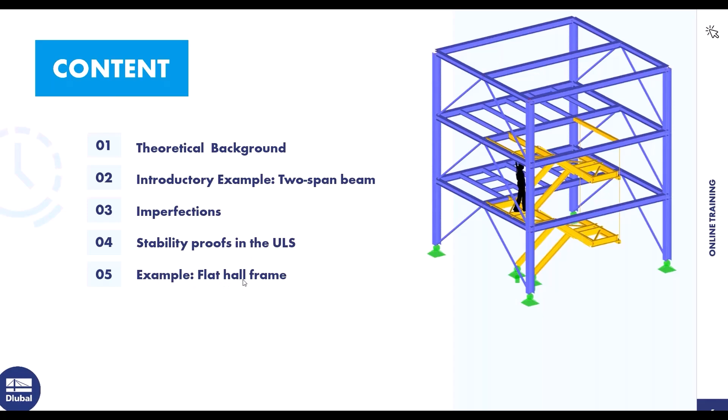Okay. First, I'll say something about the products for design according to EC3. The most important add-on is the steel design add-on. With that add-on you can design steel members according to international standards like Eurocode, AISC, and so on. We calculate or design according to Eurocode today.

Then there's the add-on torsional warping. With that add-on you can consider the 7th degree of freedom and the torsional warping. Then steel joints - with that add-on you can analyze steel joints based on the finite element method. Then there's the cross-section program, RSECTION.

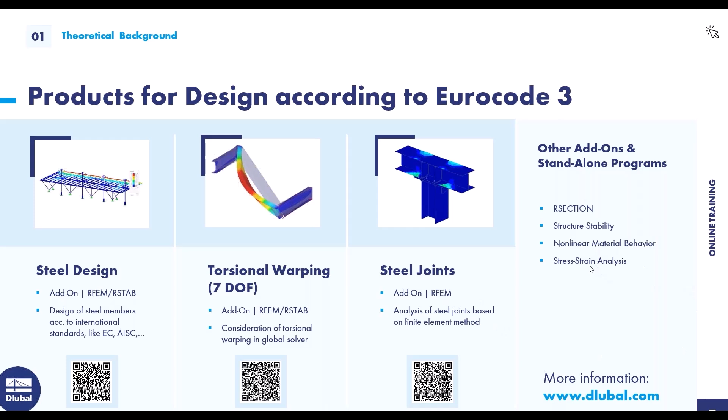Then the add-on structure stability - we use that add-on in the second example. Then there's the add-on nonlinear material behavior. You can, for example, consider a plastic design of steel plates or so on. And then there's the add-on stress strain analysis.

Okay, then a little insight into the whole safety concept in steel construction. The actions should always be smaller than the resistance. Those are the actions, this is the resistance. In addition, we have certain coefficients that we have to take into account depending on what type of proof is used. You can see the different coefficients here.

And those are the coefficients for the German national annex. You can see there is for the stability analysis another safety coefficient. But if you select the German national annex, for example, or another national annex, this coefficient is considered automatically by the program.

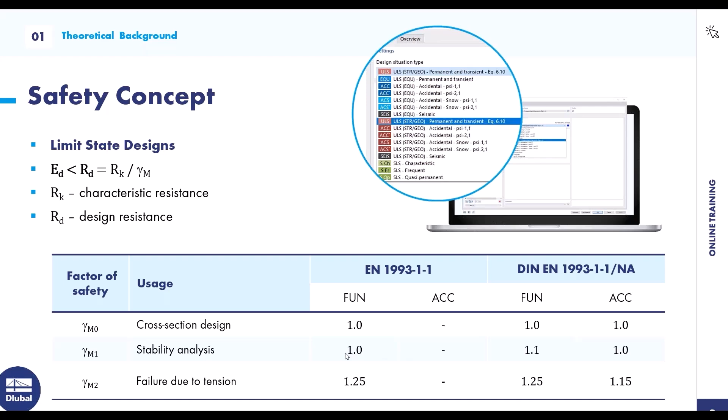So, okay, then the next slide - elastic or plastic global analysis. Whether an elastic or plastic calculation is possible always depends on the cross-section classes. There are 4 cross-section classes. In the first cross-section class there's a high rotational capacity, and this allows a plastic structure calculation.

For example, you can consider plastic hinges, but it's not so often used in practice. And the cross-section resistance can be applied plastically. Cross-section class 2, where there is a low rotation capacity, allows an elastic structure calculation. And as with cross-section class 1, the cross-sectional resistance can also be applied plastically.

The first and second cross-section classes are where you can consider a plastic cross-section resistance. Then cross-section class 3 and 4 allow an elastic structure analysis, and the cross-sectional resistance can only be applied elastically. For cross-section class 4, only a reduced cross-section resistance, the effective cross-section.

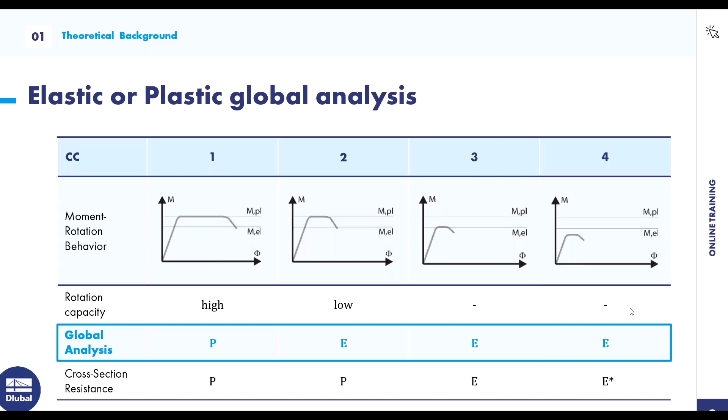That's the first example, the two-span beam, with a field length of 12 meters left and 12 meters right. A beam IPE 550, steel S235, a self-weight load case, and a load case with an imposed load.

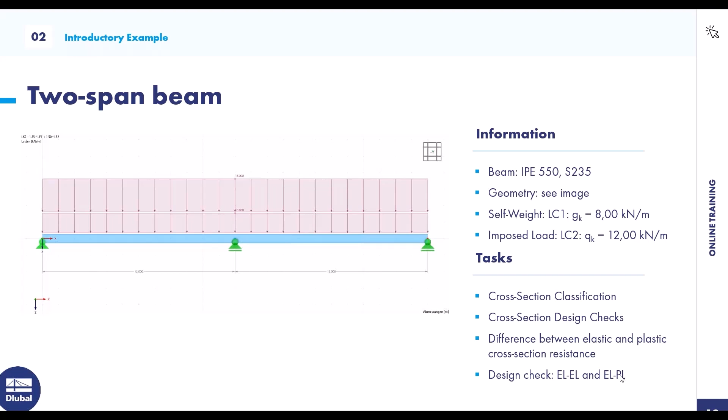And we will calculate or do a cross-section classification, cross-section design checks, the difference between elastic and plastic cross-section resistance. We take a look at the design checks, elastic and elastic-plastic. Okay, I turn to RFEM.

That's the second example, it's already prepared. But for the first example, I'll model the complete structure. File, new.

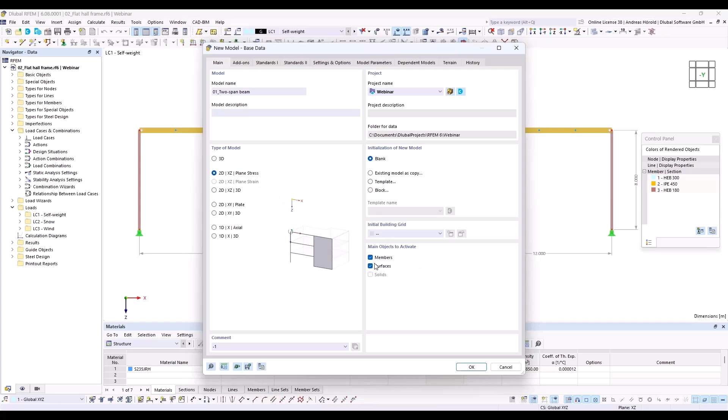So I enter 01_Two-span beam. Then type of model 2D is sufficient. We consider only members, but you can also select surfaces, that doesn't matter. And we select the steel design add-on.

Then we need to select the standards. You can see there are, for the load cases classification and the steel design, different international standards. We select the Eurocode, and for today we are in Germany here, we select the German National Annex.

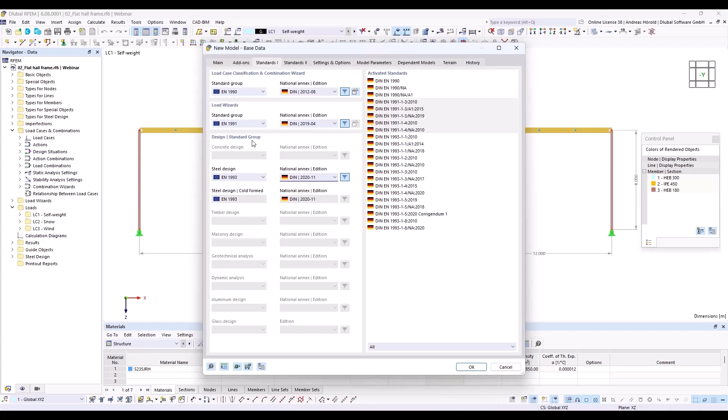We don't use the load wizards, but we use the load case classification and the steel design. We leave the dialog with OK.

So I turn to the view -y, move it a little bit. So the grid is 1 meter. I leave that. If you want to change that, you can click on this here at the bottom, display grid, right click and then edit. And you can change the space for the grid points.

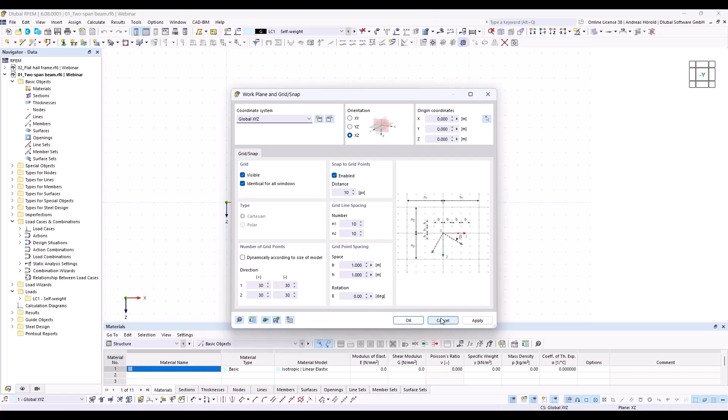So I start with the beam, here left above, new single member. I need to define a section, create new section. I turn to the library, left above, an I-beam.

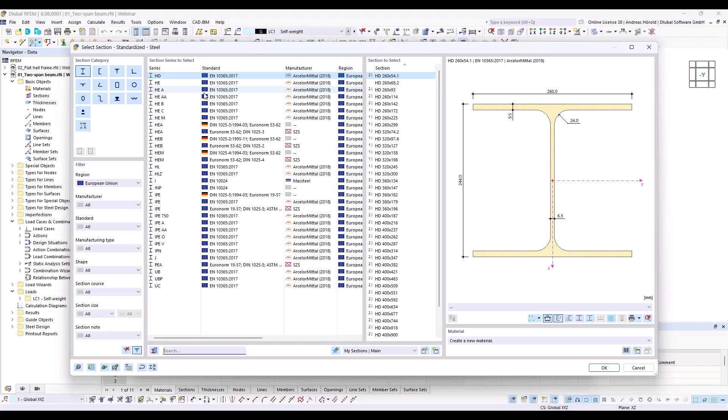That's sufficient. Okay, I select IPE 550, and right at the bottom I open the material library.

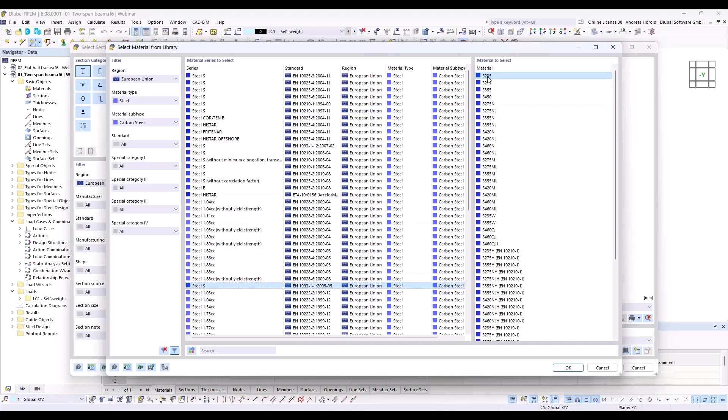And I select European Union, steel, carbon steel. There are a lot of steel materials. I use the steel material S235. Okay, you can see now the color is blue. That's okay.

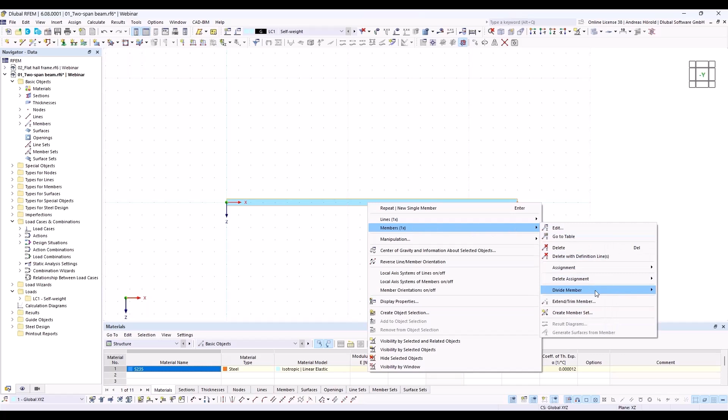So I create a member with a length of 24 meters and I divide the member in the middle with right click, members, and divide member and intermediate nodes. One intermediate node, and I create a node without dividing the member. I select this option here, create on member nodes without dividing member. Okay, there's the node.

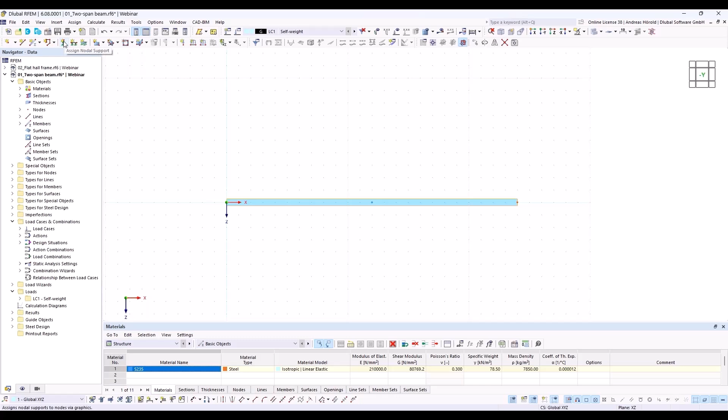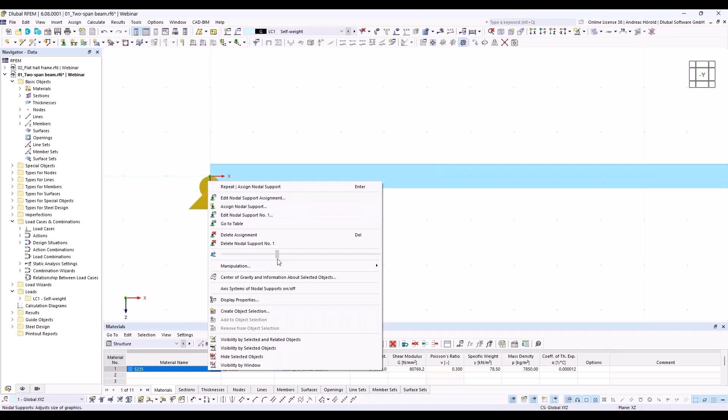So then I create the supports. Here left above, assign nodal support. So I press the edit button to take a look if all is okay. Yes, we support in X direction and in Z direction. Okay, and this node is quite a little bit small. With a right click, I can increase the size of the support. Okay, that's enough.

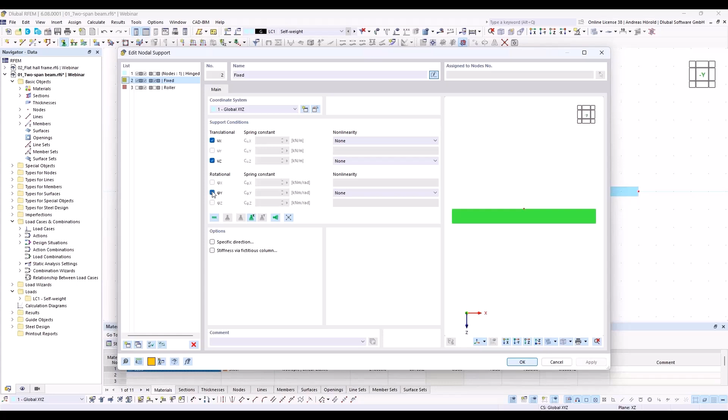So next support, I select the second support and press the edit button. Yeah, we don't want to fix the rotation for the support, and we deselect the fixing in X direction. We only want to support the member in Z direction.

So that's all for the model. I create the loads. There's a self-weight load case. I select the edit active load case. The self-weight load case is automatically created for every model. You can see also the self-weight of the structure is activated. Yeah, that's correct in our case.

So, above this button, new member load. And our load should be a force, uniform. You can see there are different options. And the load direction should be in Z direction, in this direction. So the load magnitude should be 8 kilonewton per meter.

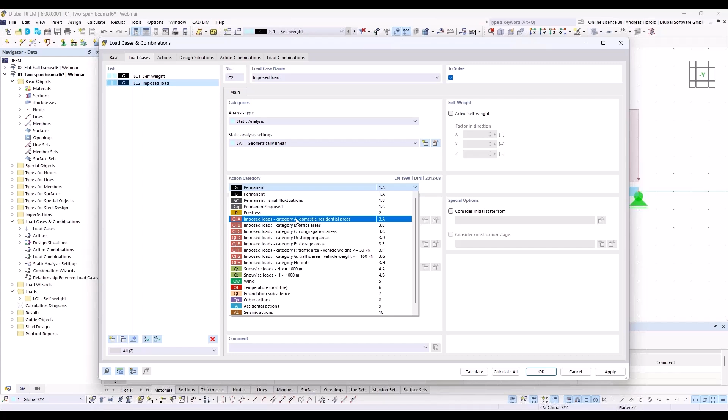Okay, so then I create a new load case with that button. I call it imposed load. And I select the action category, not permanent, but imposed loads.

Okay, then I have to create the load for this load case, new member load, and this time 12 kilonewton per meter. Okay, that's all for the model and for the loads.

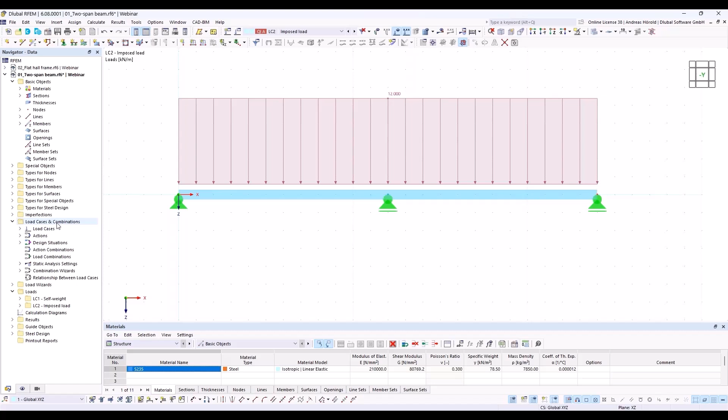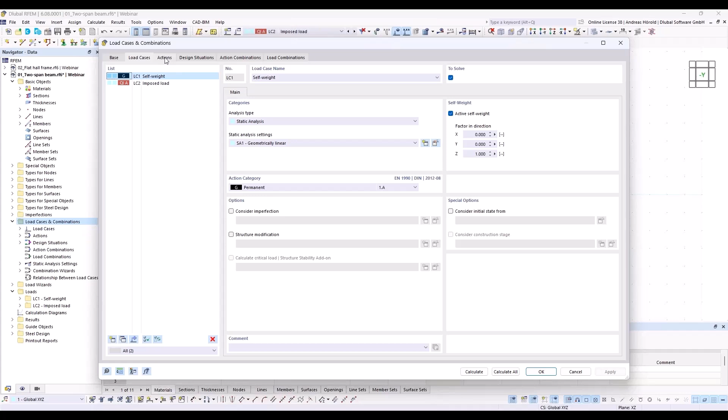I open the load cases and combinations dialog again, this time over the navigator data with a right click. Load cases and combinations, where are the base data? At the beginning, we selected the standard group Eurocode and the German national annex, and we activated the combination wizard. Those are my two load cases. We've got only two actions.

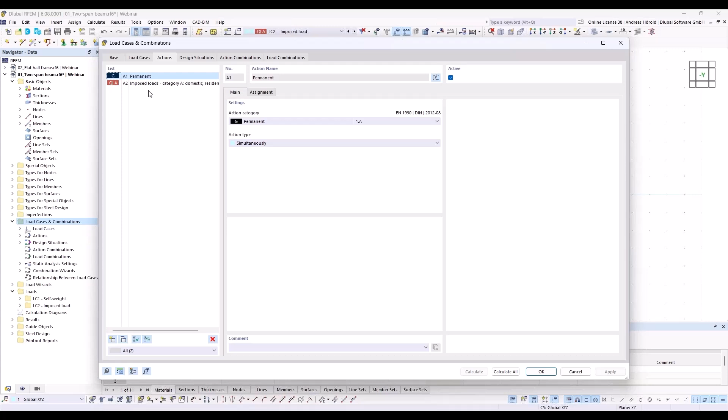Yeah, that's quite important when you have, for example, 4 wind load cases. Then there's only one action for the wind load cases. And you can combine in the load combinations either wind in -x or wind in +x and so on.

So then there are the design situations. We would like to design only according to ultimate limit state. That's why I delete the design situations for the serviceability limit state. And what's important, we need to activate the steel design.

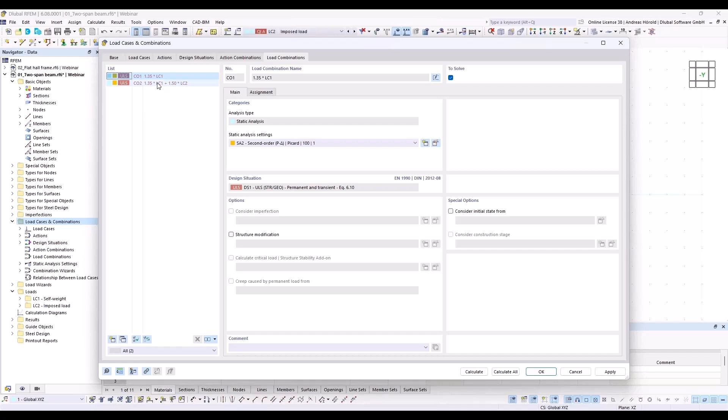So, there are only 2 load combinations. And if I turn back to the design situations and to the overview, these 2 load combinations are assigned for the design situation, ultimate limit state design. So then we can calculate also the steel design.

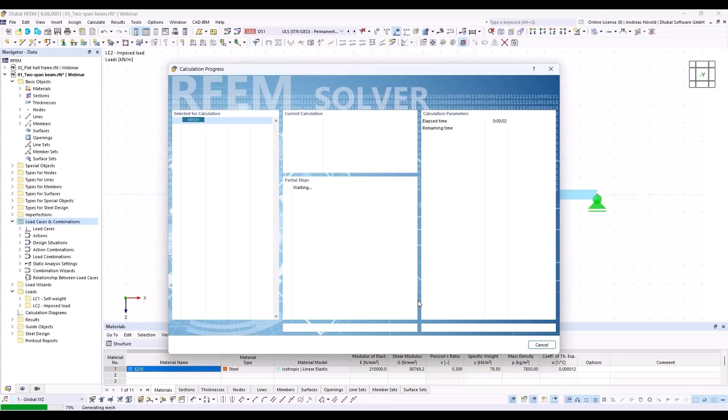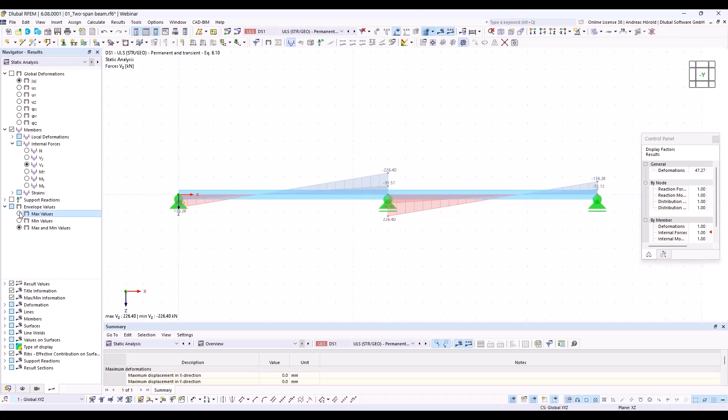At first, we take a look at the internal forces and the navigator results on the left side. The VZ, for example, I can also select only the maximum values, not minimum and maximum. So, VZ and MY.

So, and then we can go to the table at the bottom and to the steel design. An error is displayed after the calculation. This is because we haven't made any steel design settings yet. We are only interested in the cross-section verification here. Therefore,

we change to the table design ratios and members. So there's the section proof for shear and for bending. And you can see a plastic design was done by the program. So if I select the line and press this button, design check details, this dialog is opened.

A detailed presentation of the proofs, as students often request, is now possible. You can see the equations and where you can find them in the standard.

Okay, then cross-section classification. You can see where the cross-section is classified as class 1. That's why a plastic design is possible.

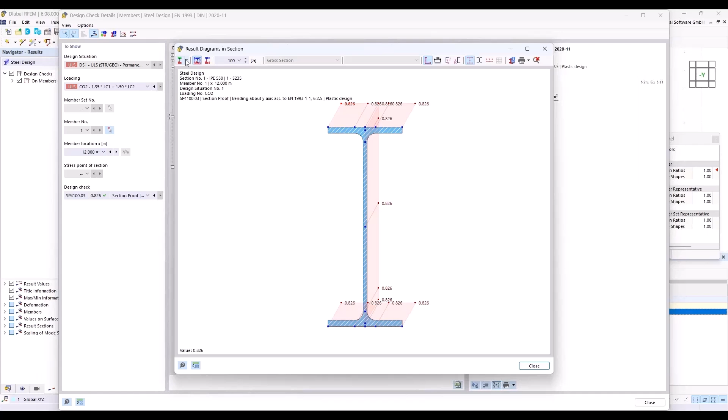So we can also take a look at the result diagram, the design ratio, the stresses. That's the stress in the middle, or over the middle support, and there's tension at the top and compression at the bottom of the cross section.

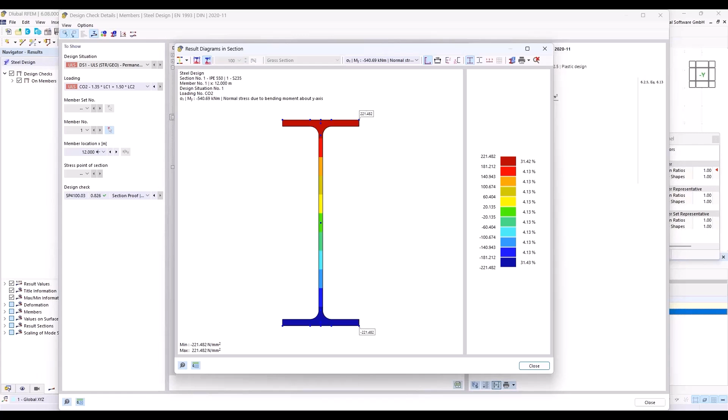So yeah, okay, that's all. Can I show also maybe the cross section information, the stress points, the different sub panels for the cross section classification, the C to T parts.

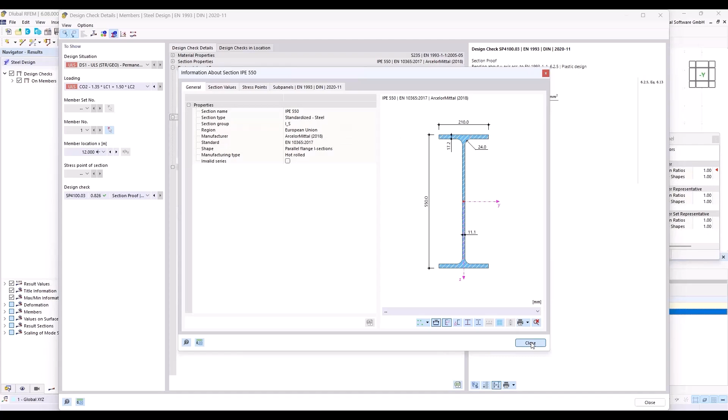Okay, that's all. Yeah, and the same - if you want to check the proof for shear, you can either press that button or double click on the line, and you can see the equations from the standard.

Okay, now we don't want to do a plastic, but an elastic design. How to do that? I turn left at the bottom to the navigator data.

Then I open the steel design folder and the ultimate configurations, and double click on it. Then I can, for example, uncheck the stability design. Then this error message won't appear, but that doesn't matter.

I select that button here: elastic design also for class 1 and class 2 sections. It's allowed to do a plastic design for class 1 and 2, but in this case we would like to do an elastic design also for the cross-section class 1. In our case, the cross-section is cross-section class 1.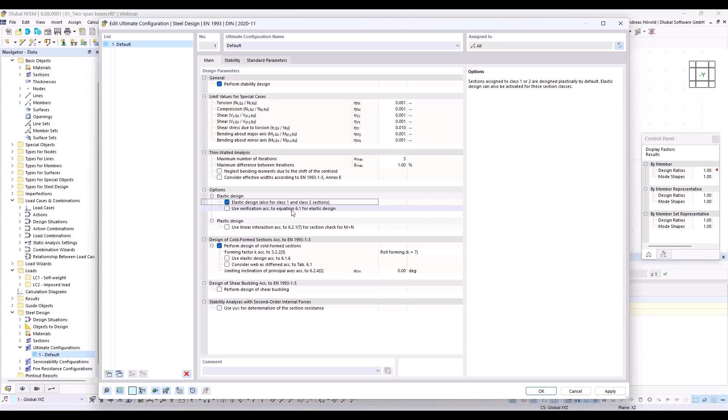Okay, we calculate or rerun the steel design again. And I select design ratios on members. I remember we had a design ratio for the plastic design of 84%, and now we've got 94%, because we do an elastic design. And if I double click on it, I can see the equation.

Okay, what you can hold in your mind is that we can do every time an elastic design. We can consider the elastic cross-section resistance. That's what we did in the second step, in that step here.

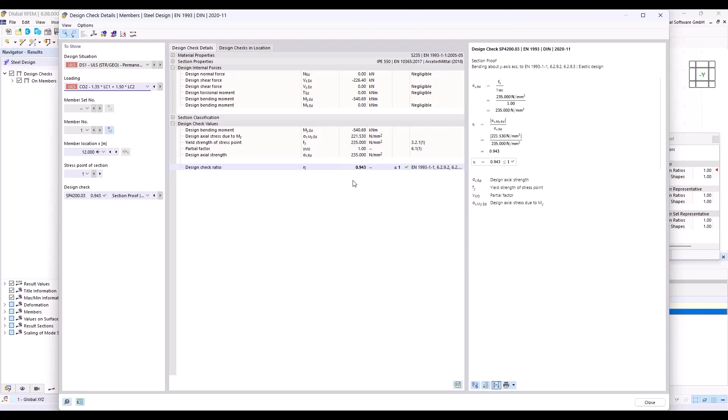So we have now learned how to carry out a cross-section check and how to take the elastic and plastic design into account. At first the plastic design, in the second step the elastic design, because elastic design is allowed for all cross sections. And in addition, we now know how to display the design formulas and compare them with our own manual calculation.

Then we turn to the next topic for today: effects of deformed geometry of the structure.

In the first training course, Introduction to Member Design, it was learned how the results can differ between the calculation according to the first order theory and the geometrical linear analysis, and the second order theory. The geometrical linear analysis is an equilibrium formation on the undeformed system, and the second order analysis is an equilibrium formation on the deformed system.

In this example of the cantilever column, this effect can be seen very well on the basis of a slender and a compact cross-section. In the case of the slender column, the increase in the bending moment at the foot point is much larger than in the case of the compact column, if one calculates according to the second order theory. And there's no difference when you apply the geometrical linear analysis.

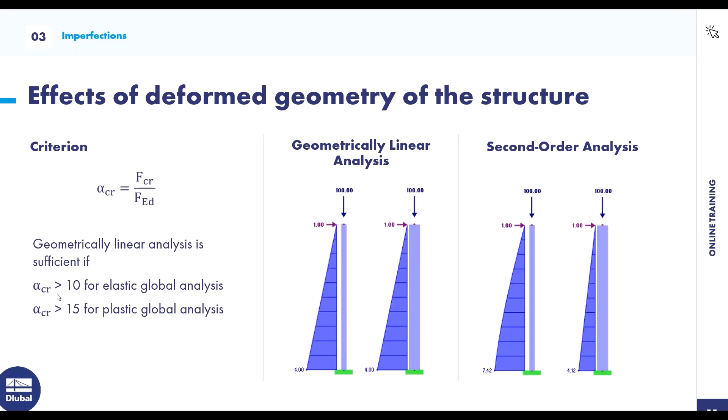And in this case, if alpha crit is larger than 10, then it's sufficient to apply the geometrical linear analysis for an elastic design. And if you want to do a plastic design, the alpha crit must be larger than 15, then you can also design according to the geometrical linear analysis.

So the next point is the equivalent geometric imperfections. Imperfections are also closely related to this topic. These are generally grouped together in Eurocode 3 as equivalent geometric imperfections. What are imperfections anyway? They are production-related deviations in the model geometry and/or in the material properties. There can be real misalignments in classic hall constructions or tolerances in production, especially when rolled sections are used, and these imperfections can be summarized as equivalent geometric imperfections.

On the left side of the graphic, you can see the initial sway, the global imperfection that can be applied to the structure. And if individual components are to be examined more closely, there is the local equivalent imperfection, for example, an initial bow imperfection. This depends on the selected profile, the yield point, the buckling curves, and the proof method. These are the two variants of the equivalent geometric imperfections.

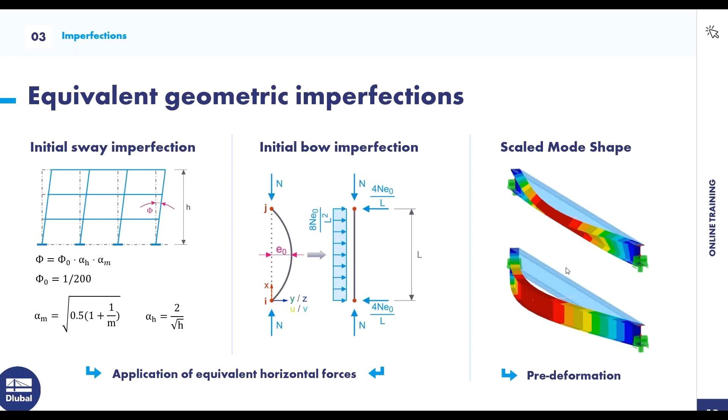Another alternative is pre-deformation, which can be calculated with the help of stability analysis. The respective governing eigenmode is scaled and applied as an imperfection. That's not so often used, but it's possible. What you often use is the initial sway imperfection or the initial bow imperfection, or both. You can see that in a later slide.

When designing steel in RFEM, 3 different stability analyses are carried out. On the left side, there's the classic flexural buckling as a lateral deflection. Then in the middle, you can see the torsional buckling in pure torsion. And on the right side, the lateral torsional buckling as a combination of the two previous proofs.

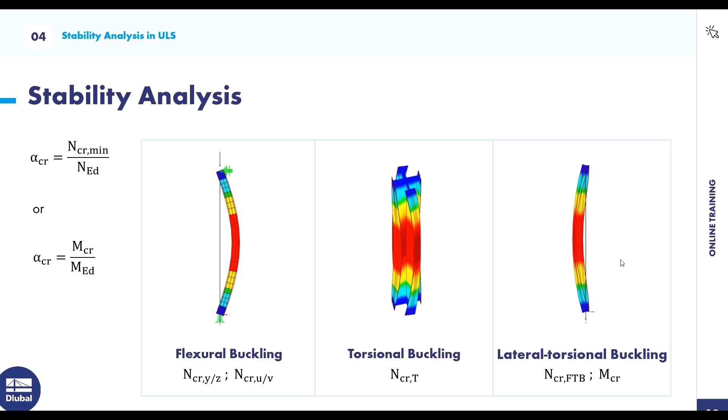Methods for stability analysis. There are 3 methods. Method A: you have to apply a global and local imperfection, and the structure analysis should be done with the second order analysis. Then you can do the cross-section design checks with the internal forces. Method B: global imperfection means only this initial sway imperfection.

So, then the structure analysis according to second order analysis. And what's quite important, you have to consider the buckling length by the member length, not with a factor. SK is equal to length.

Then method C: structure analysis according to geometrical linear analysis on the ideal structure, but in that case with the real buckling length.

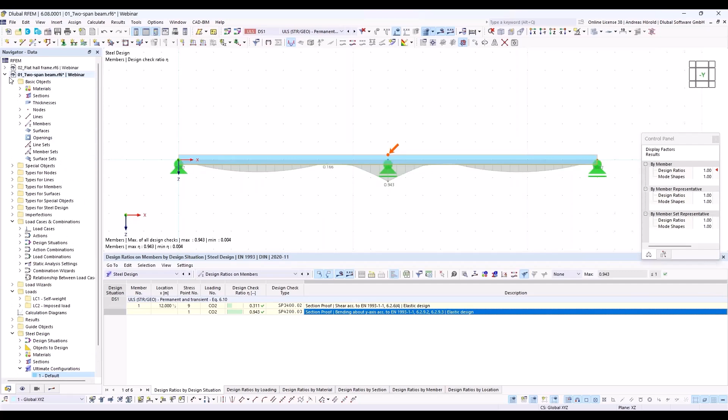Okay, so then I turn to the program, to the predefined example.

So that's the construction self-weight load case, then a snow load case with loads, for example, from purlins, and a wind load case, wind in X direction with wind pressure and wind suction.

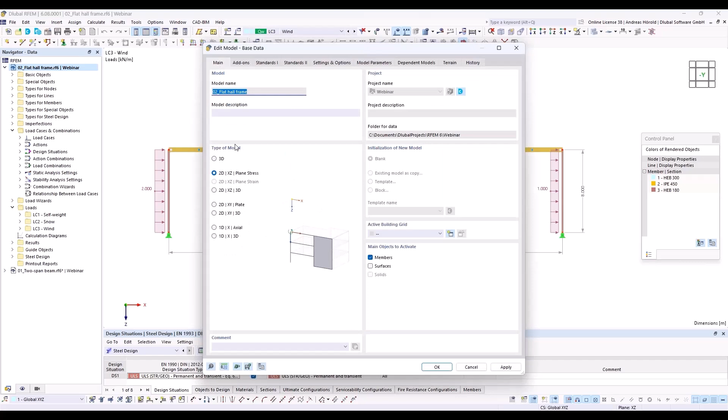Left above, I go to return to the base data, a 2D model, and we use the add-ons structure stability and the steel design add-on. And we select the standards, Eurocode, and the German National Annex.

Okay, so yeah, and we use the add-on structure stability to check whether we are allowed to determine the internal forces according to the geometrical linear or second order analysis.

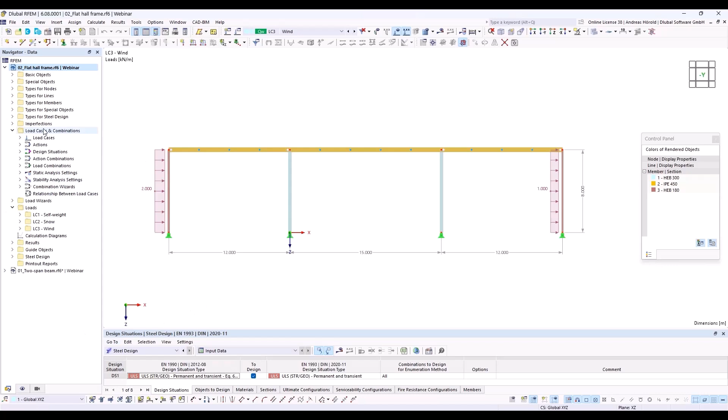That's why we turn to the load cases and combinations, and I go directly to the design situations. I select the geometrical linear analysis, and I edit that, and I activate the stability analysis. Okay, and I run the calculation.

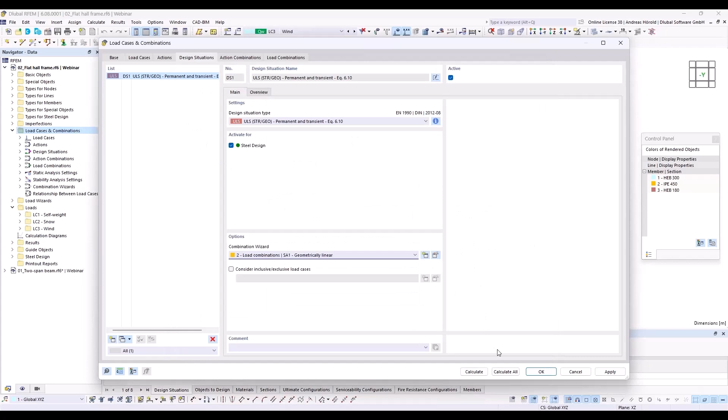So, after the calculation, we see the minimum critical load factor, 6.05 for the design situation, and 6 is smaller than 10. Yeah, we need to do a stability design by using the second order analysis.

Yeah, but what I already mentioned, for the stability design using the classic equivalent bar method, means method C, the internal forces can be calculated according to geometrical linear analysis, and yeah, buckling lengths must be assigned to the columns.

Yeah, but for the design of the lateral torsional buckling, the application of the second order analysis is also required with this method. That's why I switched to the second order analysis. For the columns, we consider the effect twice, one time with the second order analysis and with the real buckling length. But we need to apply the second order analysis because of the horizontal beam and the lateral torsional buckling.

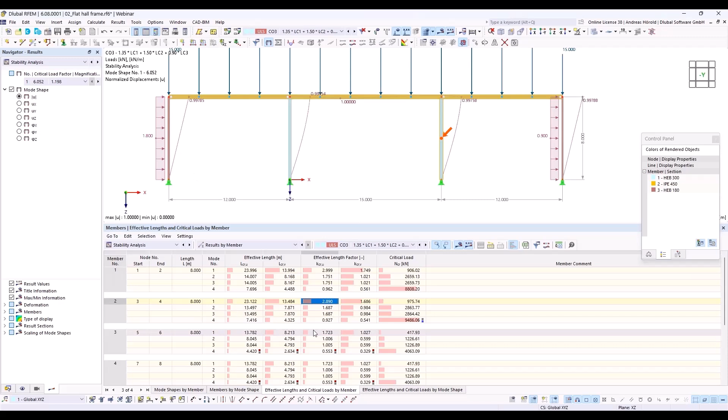So this column has an effective length factor of 3. This column, we apply also 3 for this column. And for the left and the right column, 1.72.

So I turn back to the design situation and we run, or we use the second order analysis. Okay, that's okay.

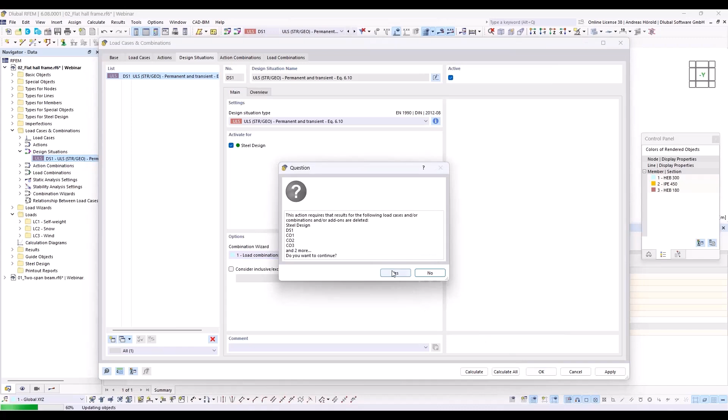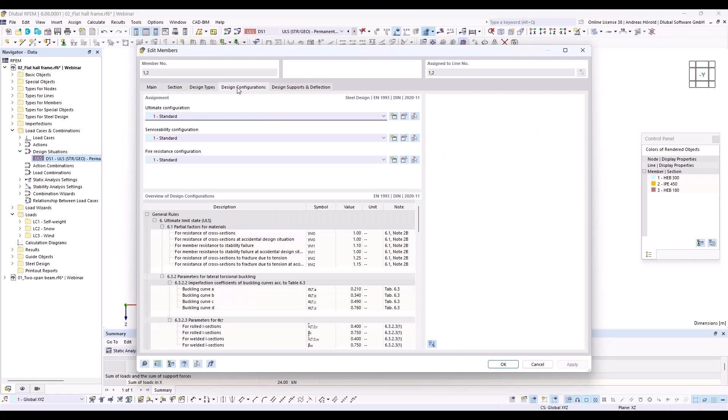So now we define the effective lengths, or we assign them to the columns. I select the inner columns, then I do a right click, members, edit, and I turn to the design configurations and design types, and I define effective lengths.

Okay, then I select the left and the right column. I press the control key, you can see the plus sign. I would like to consider or select both columns. Then right click, members, edit. The same procedure, design types, effective lengths, and 1.72.

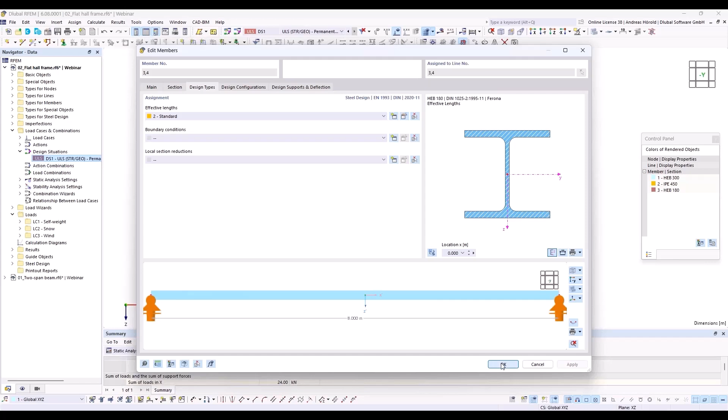And you can display the effective lengths. Then we go to the navigator display, then types for steel design, and I select member effective lengths. And you can see the factor 3 and 1.72.

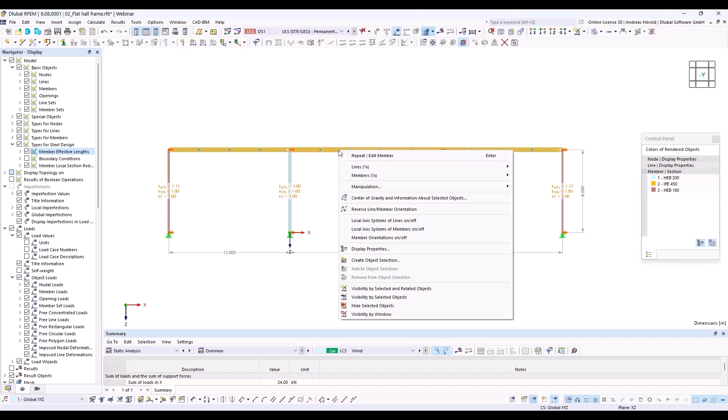So then I select the inner horizontal beam by right click, members, edit, then design types, effective lengths. I create a new effective length.

So this time we would like to consider the horizontal supports, for example, by purlins. That's why I press this button here, select member or member set. I select this member, and the program will detect all these nodes here. Okay, you can see that here.

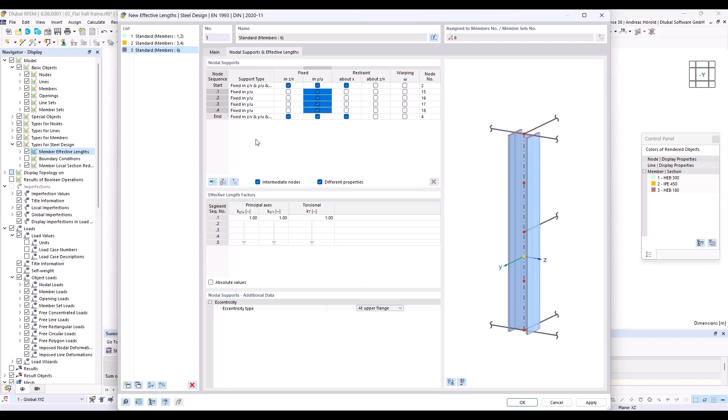And we would like to fix it in the horizontal direction. I would like to consider that the upper flange is supported, since the purlins lay over the horizontal beam. That's why I select all these lines here, and I define the eccentricity type at upper flange. Okay, I can leave the dialog and you can see the supports: fork support at the beginning and at the end, and for the inner nodes, there's only a horizontal support at the upper flange by the purlins.

So, okay. We need to do the same for the left horizontal beam and the right one. I select both with the control key.

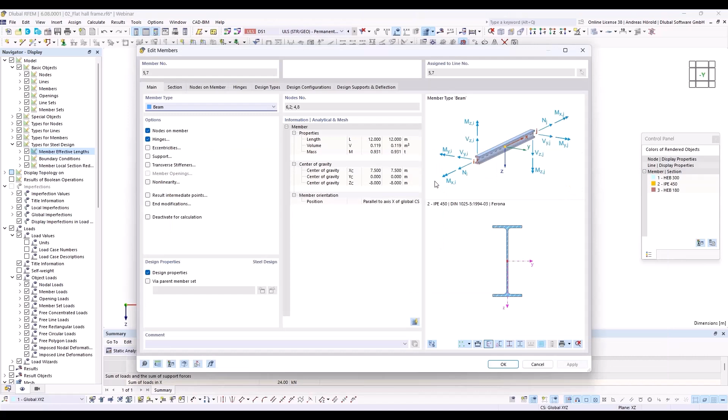Then members, edit. And I select the same effective length as for the middle horizontal beam, and you can see the program detects automatically that there are only 3 nodes. You can see 3 nodes are supported and 4 nodes.

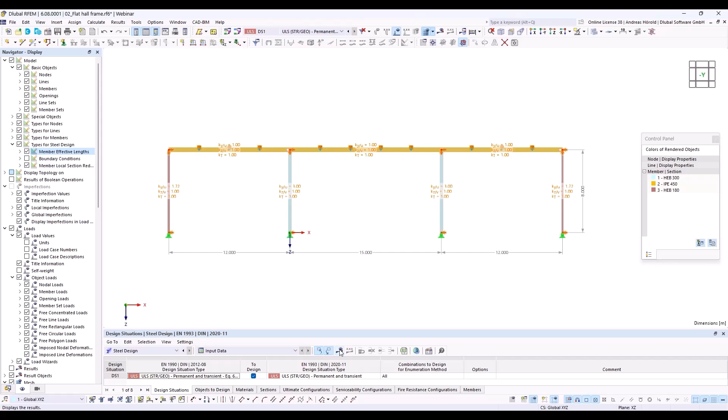Okay, then we can run the calculation. I turn to steel design and press this button, show results, and the calculation starts. So the calculation is done.

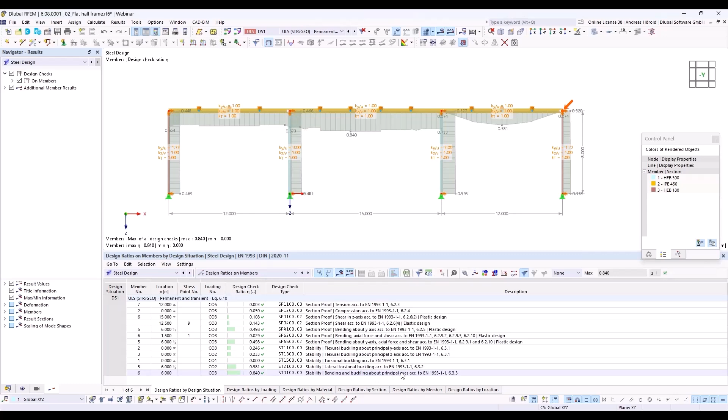We have a maximum design ratio of 84%, stability, bending, and buckling about principal axis. So I can double click on it and you can see the design checks, the equations, and where you can find it in the standard.

Okay, this was the classic structural component design, method C without imperfections, but effective member lengths. Now we want to examine the model using the approach of global imperfections and the structural component design method B.

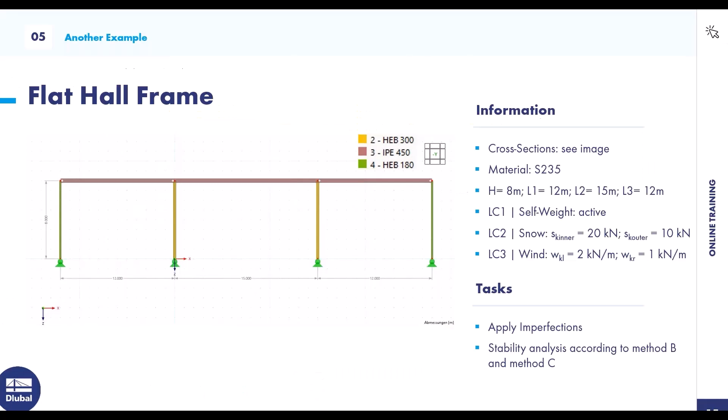I turn back to the PowerPoint. We did method C, with the effective member lengths and without imperfections. And now we define imperfections, and I delete the effective member lengths for the columns. We say, or we consider SK equal member length.

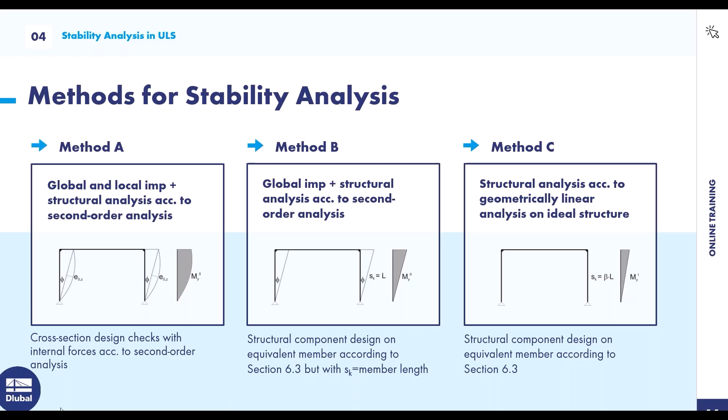Okay, I turn back to the program. Left at the bottom, I go to turn to the navigator data, then types for the steel design, effective length, or let me save that state, save as, out results.

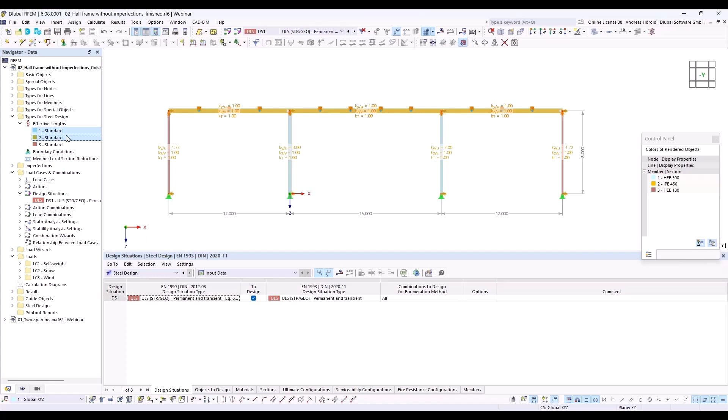So without imperfections. Okay, I overwrite it. So, and now I delete the effective member lengths for, or the buckling lengths for the columns. Delete. Okay.

And in the second step, I need to define imperfections. So above here, that button, new member imperfection. I have to create an imperfection case in the first step, imp x. We have got imperfections and imperfection cases. You can consider more imperfections in one case. That's why we have imperfection cases and imperfections. That's the case, okay?

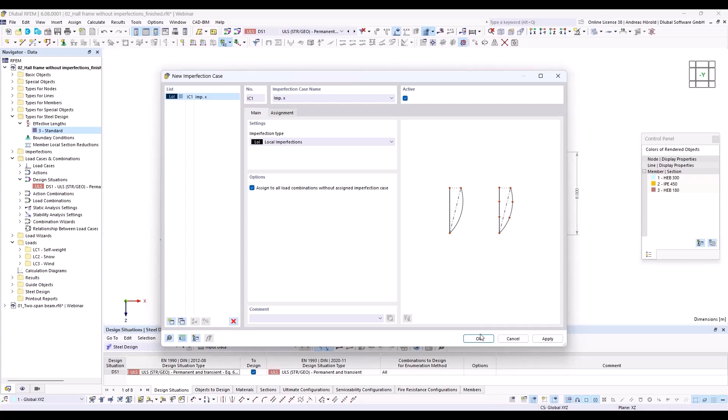And now we create the imperfection for that imperfection case. We define an initial sway. Definition type is Eurocode 3. The imperfection direction is Z, in the strong axis.

Then the basic value is 200. I can measure the structure height, 8 meters. Number of columns in one row, those are 4. Yeah, and the reduction factors are calculated automatically.

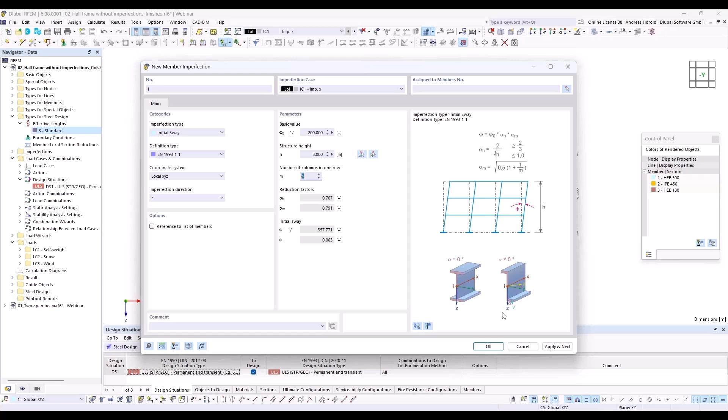Okay, and I need to assign it to all 4 columns. And to display it, I have to press this button above, Show Imperfections. So, and now we can run the calculation.

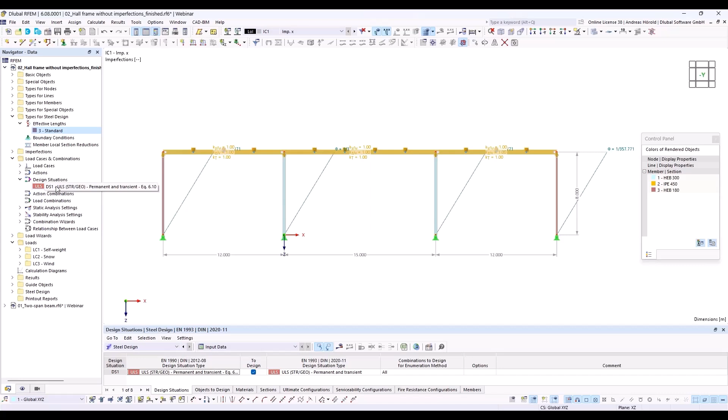Or before I do that, I take a look at in the design situation, second order analysis. And it must be checked that the program considers the imperfection cases. Okay, now we can calculate all.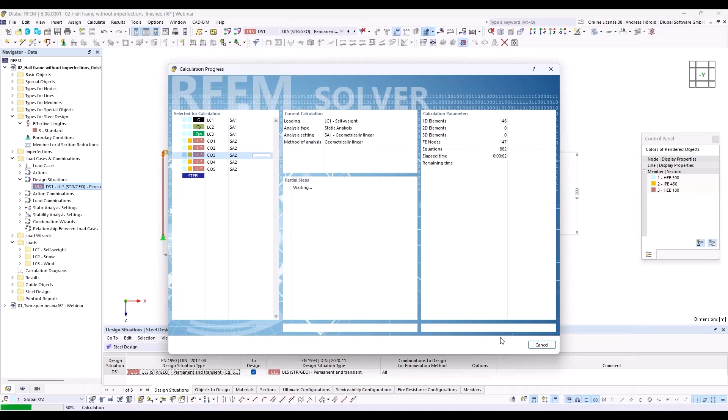So we go directly to the steel design. Design ratios on members. Yeah, and you can see the design ratios. With the method C, we had a design ratio of 84%. Now we've got 86%. That's quite similar, different methods.

Okay, yeah, that should be all for today. You learned in the second example how you can apply the method C in the first step, and then with imperfections with the method B in the second step.